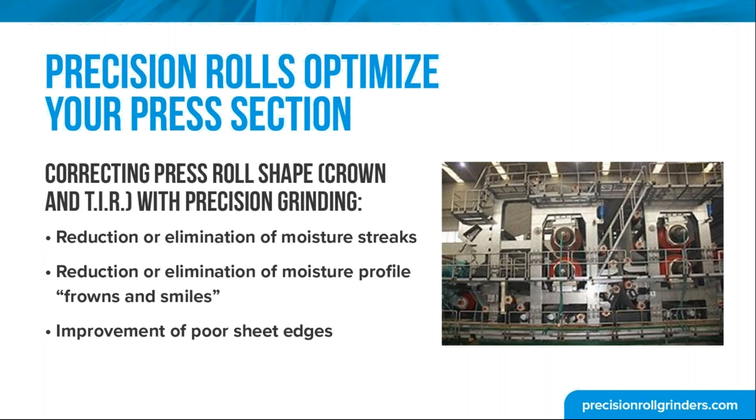Let's start with the cost of moisture streaks. The rule of thumb is 4 to 1, right? For press section to dryer section, the 4 to 1 rule of thumb is 4 times more expensive. And I've heard everything from 3 to 1 or 4 to 1. It's 4 times more expensive to take the water out in a dryer section than it is in a press section.

So what often happens when you're dealing with moisture streaks that could be originating in the press section, and again, we understand moisture streaks could be coming all the way from the head box if you've got weight variation. But for the sake of this webinar, let's assume that you've got a moisture streak that's coming out of the press section. Again, paper machines are being pushed to run faster than ever, more efficiently than ever.

Quite often that moisture target average has to be reduced to manage the streaks that are coming out of the press section. One of the ways to do that we see quite often is to drop the machine speed. There are a lot of machines out there, I should say, that are running on throughput maximized control, where the machine speed is actually controlled by the moisture of the sheet, I should say.

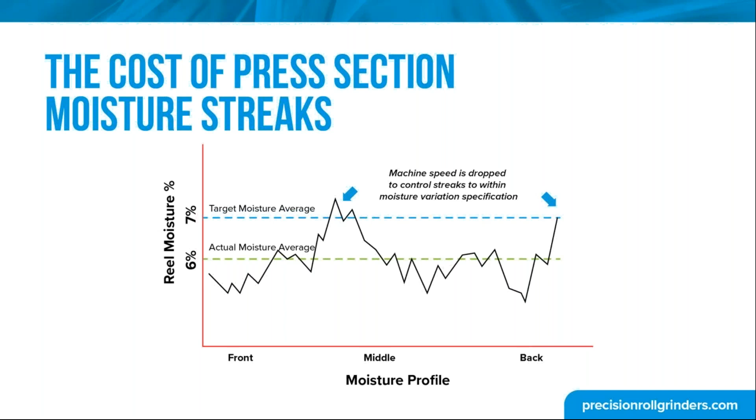So this is actual data. We've moved it around a little bit to protect the innocent because, of course, we're cognizant of the non-disclosure agreements we have out there, but it had a couple of moisture streaks that were really causing trouble.

Through working with this partner on critical roll grinding and critical shape, and we'll go into a slide here shortly where they actually had offset crown that was causing some of the issue just off the center of the sheet, and could have been causing some of it on one of the edges as well.

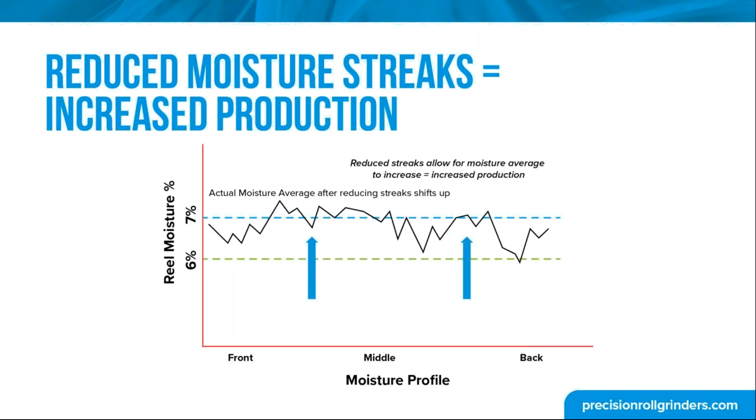But by working to eliminate those moisture streaks, as all you know in paper industry, you can shift, right? You can shift that moisture where you want to run an average of closer to 7% as opposed to 6%. Now you can speed out from under that and allow that moisture to naturally drift up, the overall moisture average. Here can be the culprit.

Roll crown matters. And quite often we talk to partners and they say, well, listen, I've got a really soft cover. This is a long nip press. This is an extended nip press. Understood. And there is some forgiveness in a soft cover. However, the cover softness or hardness, the cover design, the open area in a cover is all designed for a very, very specific nip width and hydraulic load.

So what do we do if the machine's running well, or what do we do if we need more production? We speed up, we change the entire dynamic in that press. It's more hydraulic load. It becomes more critical that roll shape be right. All of it goes into play. You know, we understand there's felt design there too. There's cover, again, there's open area in the cover. There's Uhle box, vacuum, everything going on in the press section.

However, I think what we fail to realize is the tremendous hydraulic pressure differences we put on our press sections when we have to run a little heavy for strength, or we're trying to run faster, or we're coming into the press a little wetter because of something that's going on in the forming section. All that really promotes the need for very precisely ground and shaped rolls in your press section.

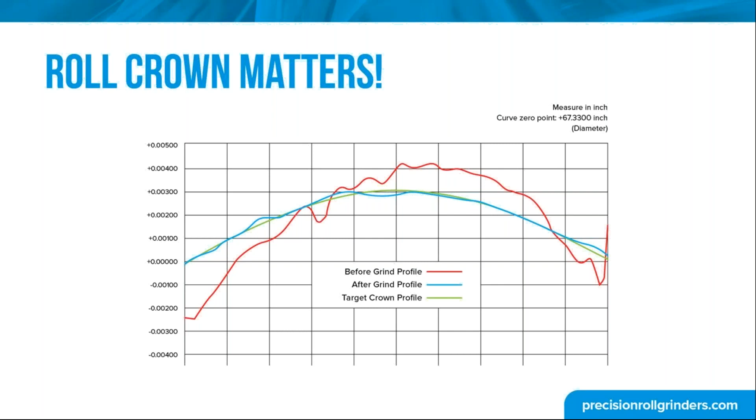Taking a look at the sheet through the dryer section with temperature indication, perhaps even seeing if that works in the press section, if you can see temperature differences. Obviously scanners on the paper machine, taking a look at the reducing 2 sigma variation in moisture with proper roll grinding, different felt design, those kind of things.

We're going to talk about it later in the webinar, but one of the things that Precision Roll Grinders has done in the last 2 years is develop an entire application engineering team. And our application engineers are responsible for working with our account managers and with our customers and our partners on diagnosing those things and taking a look at what is moving statistically to the point of 6 sigma rigor around the statistical analysis to make sure that all parties understand dependent, independent variables, what's moving in your press section, and how to optimize that overall.

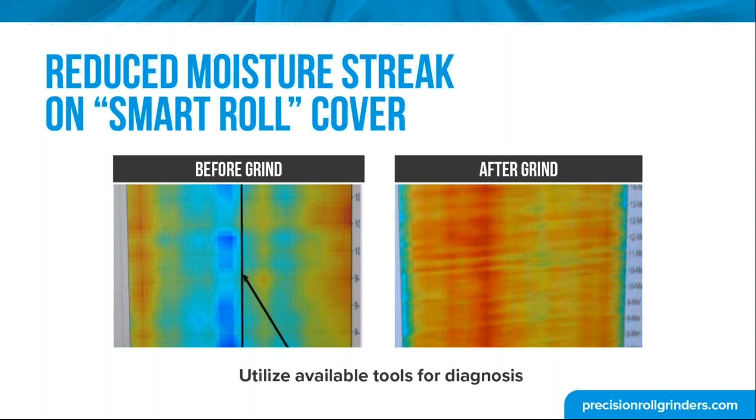Quite often, mysterious things that are happening in a press section can actually come back to roll service. And we'll talk about the mechanical service piece of it as well. So what can it mean? This again is the case that goes back to those first two profiles that we showed, where the machine was being managed by exception to those moisture streaks, and it was running 2,500 feet a minute, making about 50.5 tons an hour. They were driving the average moisture down to 6.2% to manage the peaks.

Once the peaks are eliminated, what can happen? Well, they were able to speed up 25 feet. And again, 25 feet, big deal. You guys know as paper makers, it is a big deal. So increased incremental production was 12 tons a day. And you can plug and play with these numbers, and we can actually provide templates for you to do that.

We understand a lot of these numbers are confidential, but if you were able to extrapolate that over the course of a year, it's $1 million a year in improved production, just by being able to bump that moisture target where it needed to be. The target on this grade was actually 7.0%, but it was running at 6.2%. So that difference is worth over $1 million a year on this single paper machine. So the economics are really big.

And again, we encourage you to be working with your vendors and your partners on really driving to this kind of economic value. It's something Precision Roll Grinders is committed to doing with our partners, the application engineering, the statistical analysis to ensure that we're looking at the right variables with our partners to drive true economic benefit, well beyond any additional costs that may be associated with precision grinding and precision mechanical work on these rolls.

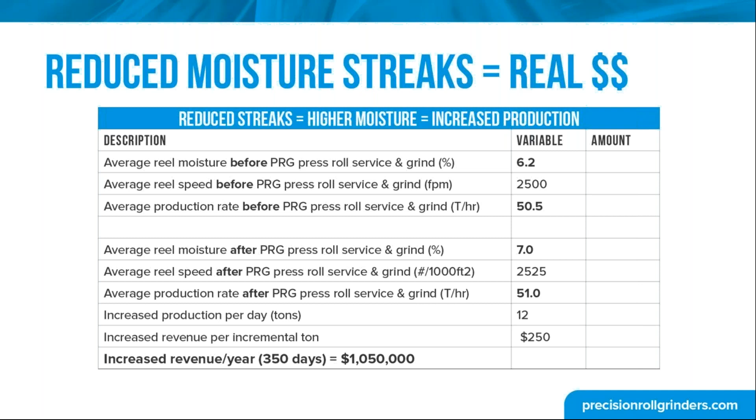Again, the whole purpose of the press is to impart, really, in a lot of cases, particularly in larger, heavier weight machines, containerboard machines that are 300 plus inches wide, that are running 60 or 70 tons an hour, the hydraulic pressure in the press section is tremendous. So if you've basically put a cam in as a press roll because the circumference of the roll isn't as perfectly round as it can be, and you're not concentric from the face of the roll to the journal and to the bearing seat specifically, that's putting undue stress on those big expensive bearings. It's putting undue stress into the press section, because again, there may be soft covers.

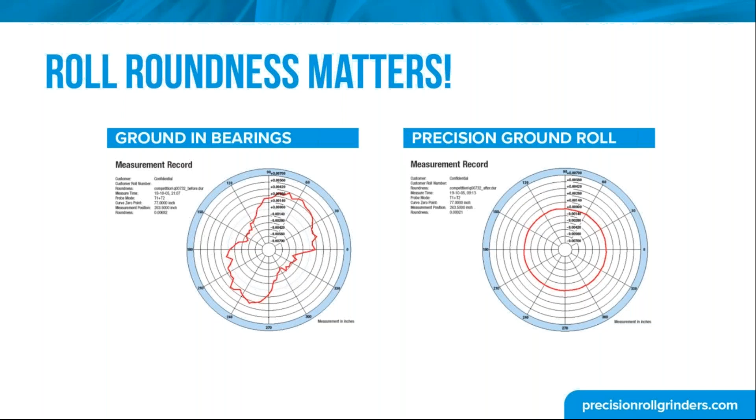So again, grinding in bearings versus precision ground roll, which is ensuring that not only is the face of that roll as close to perfectly round as possible, but it is concentric to the journal as well. So what happens when you grind in bearings? Well, the roll moves when it's ground. Obviously, there's play in that bearing. And

the argument that it should be ground the way it's going to run is just not geometrically correct. The physics don't play out. It's going to move as much as that bearing allows it to move. And then what you actually end up doing over time, when it's done repeatedly, is compounding the issue. So the roundness that the OEM specifications generally call for is really not possible, particularly over time. And again, the concentricity is not possible, and that's important. The face of that roll should be the same distance from the journal all the way around.

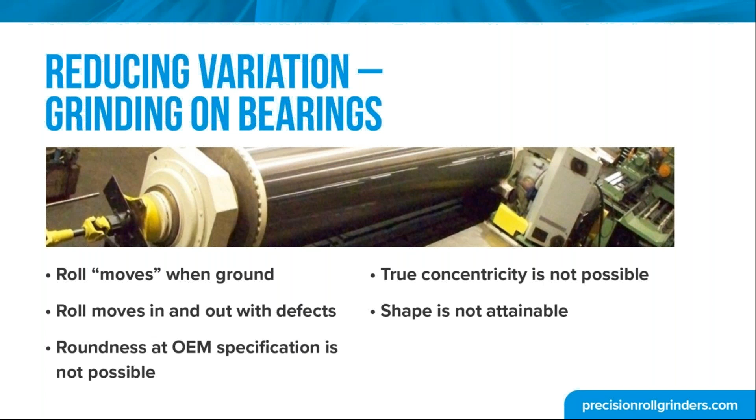And then the last bullet point there, which is also very critical, is that the shape that we talked about earlier, which is generally the issue in paper machine press sections with profile streaks, right? The shape is really not attainable either if you're grinding in bearings. So we'd like you to keep that in mind. Those are the grinding aspects.

And then there's also mechanical aspects around your press rolls as well. Roll life and startup comes from mechanical excellence. It comes from precision mindset with mechanical rebuilds as well. And this is just a list of all the things that we would encourage you to keep in mind. Obviously, in press rolls, there's vacuum boxes and rolls. But every roll's got journals. Every roll's got head fits. Those kind of things. Take the time to take a look at what your roll service provider is handing back to you when your rolls are serviced.

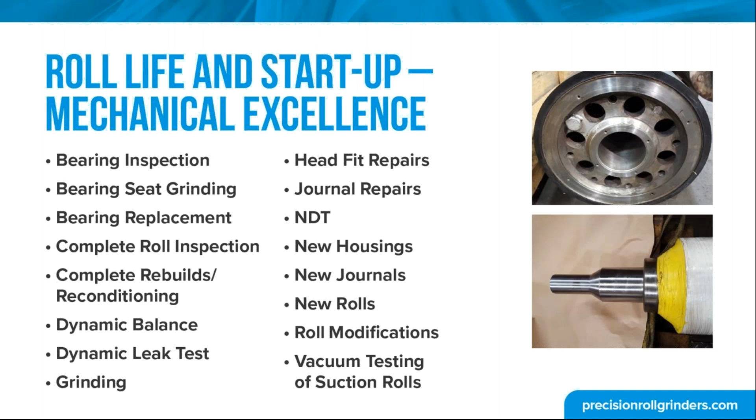Precision maintenance is more than just precision grinding. It's OEM or better rebuilds. Most of these rolls have been around for a while, so people understand the designs. There's always improvements in seals. There's always improvements in what we can do with showers. There's always improvements in what we can do to make sure deckles are free throughout the entire run life of a roll. And when that's done, there's a lot of cases we've worked with partners where we've extended the life of a press roll by double.

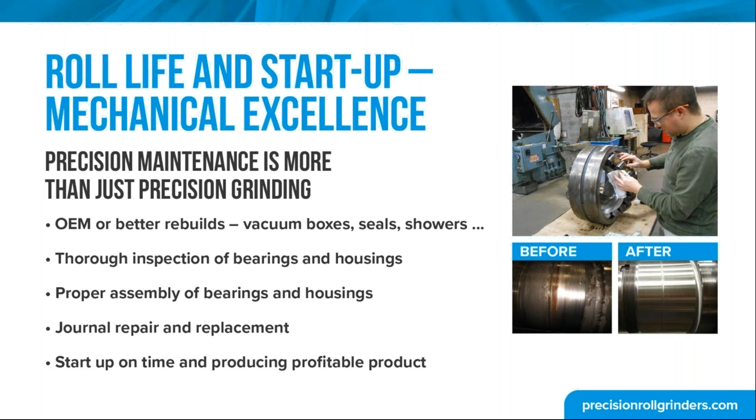And again, shape and roundness had a lot to do with that, but the mechanical aspects of it have a lot to do with it as well. Obviously, journals, bearing seats, these are big, expensive bearings in most cases. You want to make sure that good preventative, proper maintenance is being done.

The deformation of a roll is a function of the wear, and the wear of a roll is a function of the deformation, right? It's almost like the washboarding effect on a road. So the closer you start to perfectly round, the more time you have, and it's not linear, it's actually exponential. So keep that in mind too.

Press rolls are very time consuming to take in and out of the paper machine. They're very expensive to take in and out of a paper machine. So how can you partner with someone to extend that life, to get twice the life out of it? It is doable.